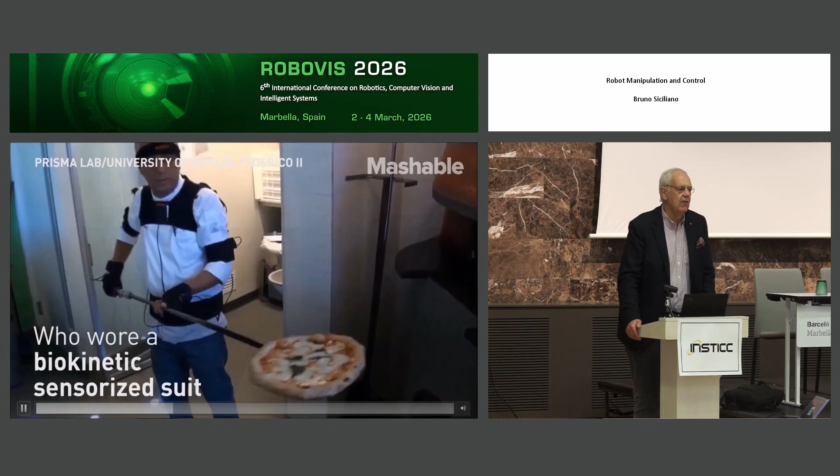Unfortunately there's no sound, but this illustrates the concept of dynamic manipulation. We built a platform, a humanoid platform. We had to make some choices because we wanted to control all the degrees of freedom, so we built our own torso, and used 2 Powerball arms manufactured by Schunk, together with 5-finger anthropomorphic hands.

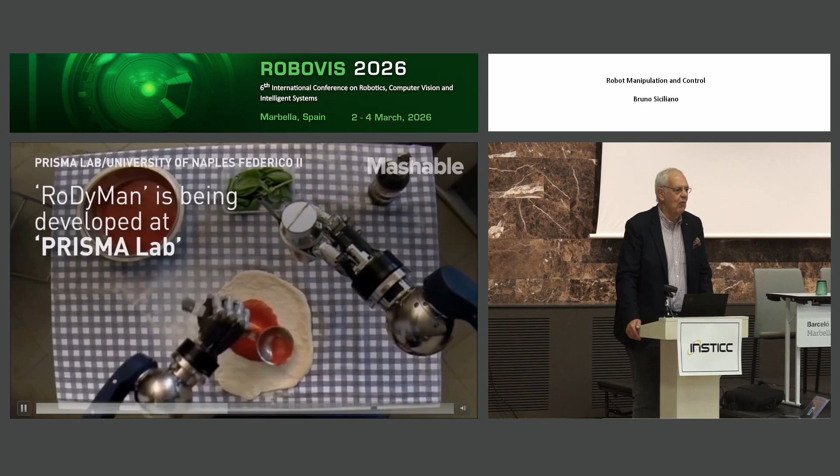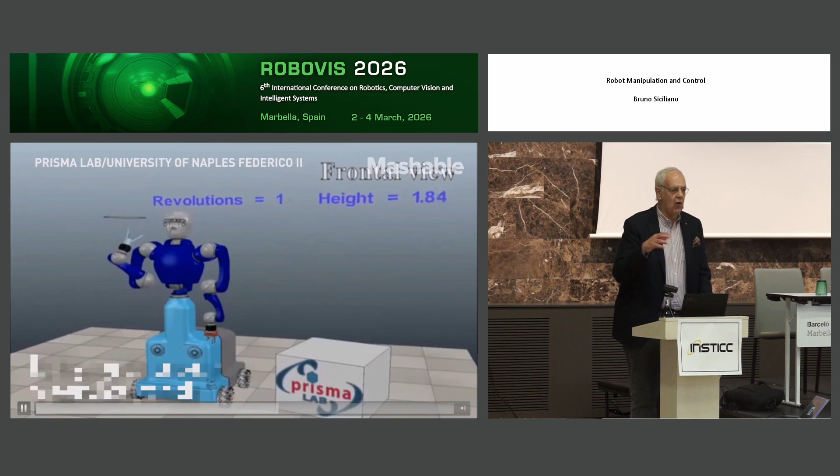We involved a Michelin pizza chef into the project, acquiring his motion through an Xsens suit with gyroscopes, accelerometers, and inertial measurement units. Then, through the Jacobians, we transformed his kinematics and biomechanical data onto the system.

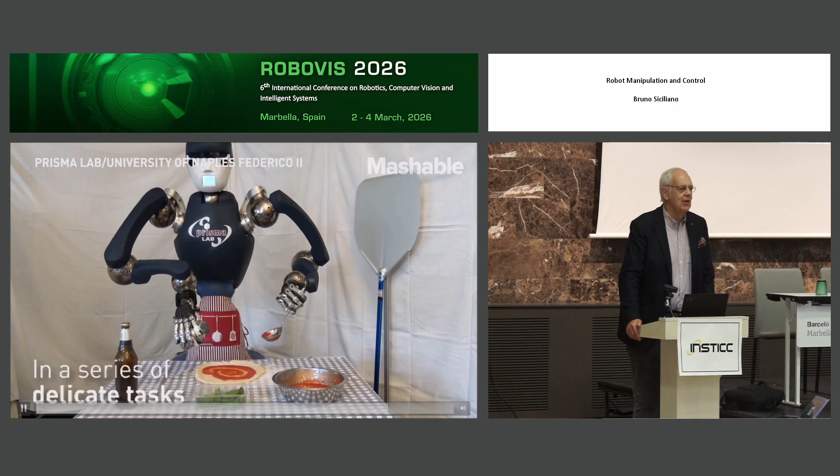You cannot imagine the coverage we had in the media, which was also a good way to disseminate what we're doing as a robotics community. The European Research Council places a lot of attention on dissemination, so this was a perfect media expedient to attract attention towards the robotic community and ultimately our lab.

It was clear to us that it was very difficult to develop a general theoretical framework for dynamic manipulation. So concerning the issue of non-prehensile manipulation, the best we could do, as this video clip shows, is to develop a number of primitives, trying to solve one primitive after the other.

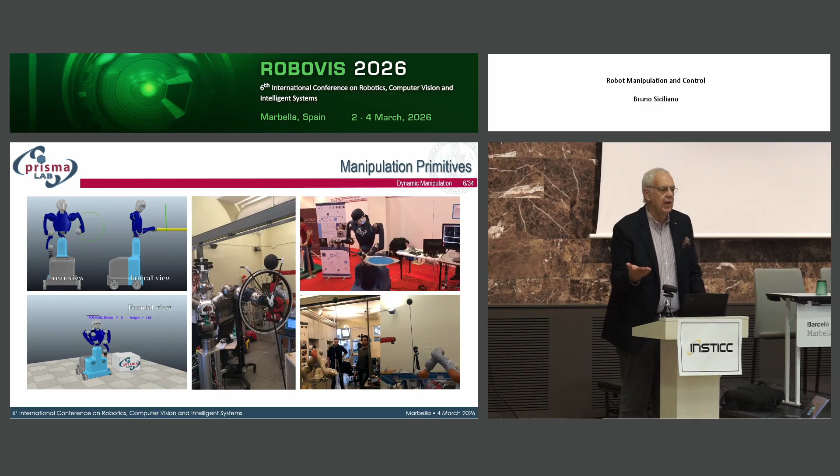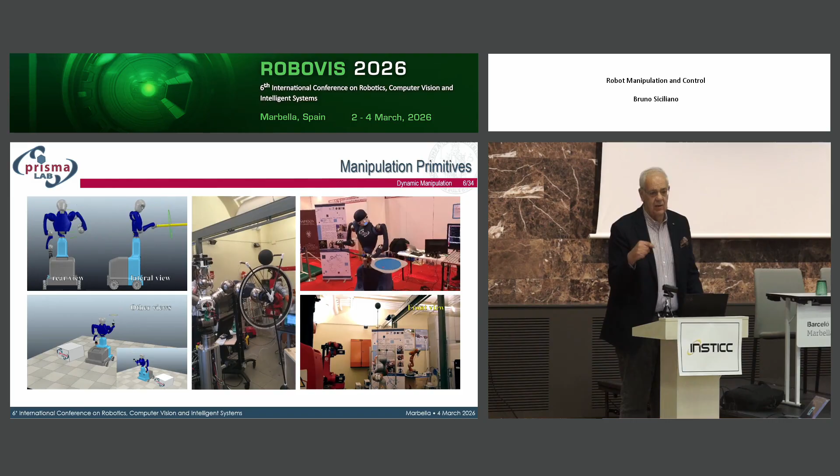For instance, the one on the upper right shows the issue of controlling the motion of the disc of pizza on a peel, with two motions: a swivel motion and a tilt motion. At the end, you want to control three degrees of freedom, because you have to control the position of the disc on the peel together with the orientation. That's why I say this is an under-actuated mechanical system.

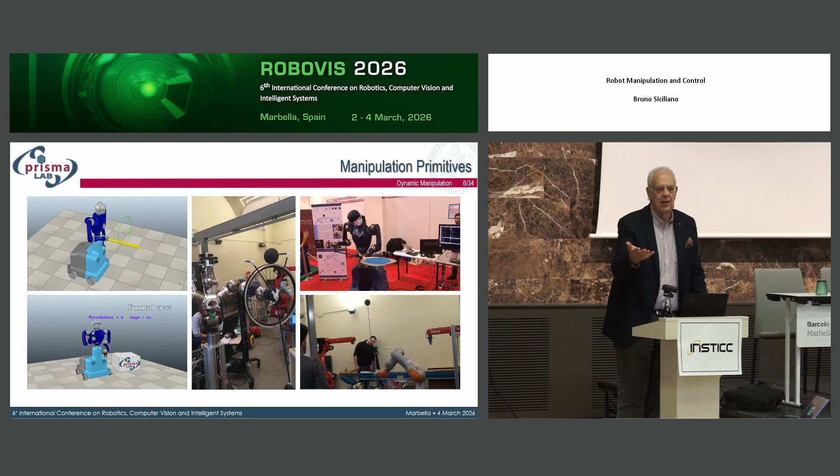Then you see some visual servoing, some sort of critical stability issue, like balancing a slender stick with a ball with the robot using visual servoing. That's another application of non-prehensile manipulation.

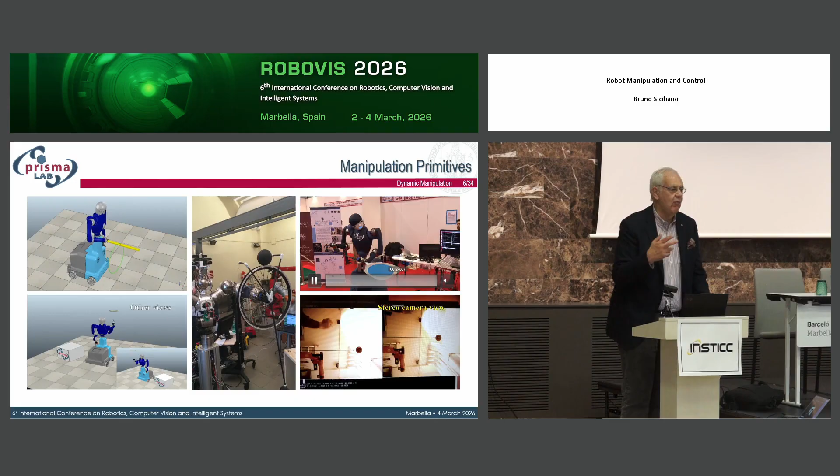Or maybe balancing a ball on a wheel, on a tire, where the ball can fall on all sides. So we were exploiting the redundant degrees of freedom of the platform.

Then you see some kind of simulation like a robot doing a hula hoop, or, the one on the lower left, just throwing a deformable object and finding a global optimal solution for what is the best posture for the robot to catch a flying deformable object.

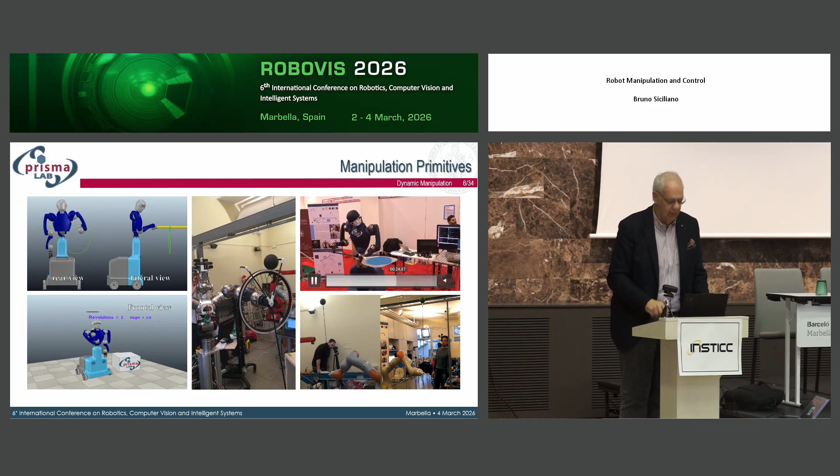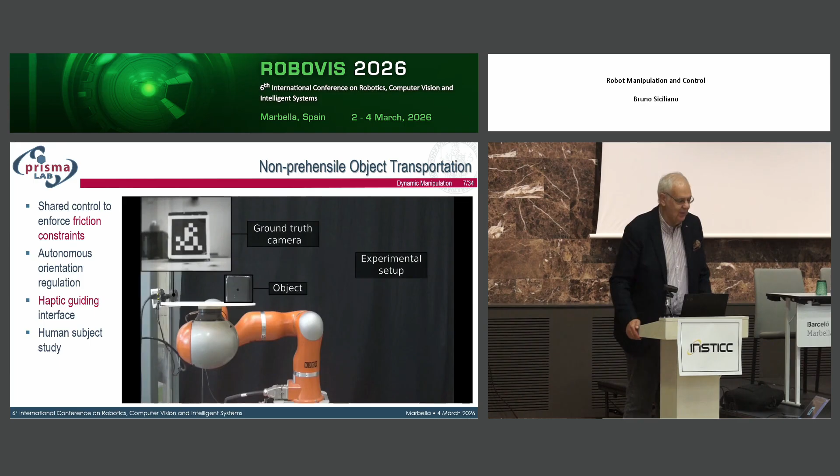After the end of the grant, we did some more work concerning non-prehensile object transportation. Suppose you want a sort of robotic waiter to carry some kind of object, and the object might be placed on a tray. Clearly, because of the dynamics, and also because you have some friction, typically what happens is that the object will unavoidably fall.

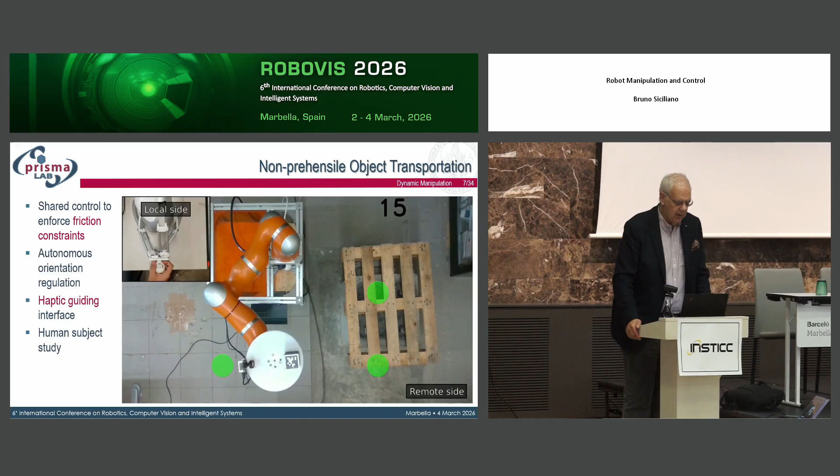This is a recent Transactions on Robotics paper in which these results are published. We carried out a study with human subjects using a haptic interface, and basically the algorithm we developed tries to compensate for dynamic effects, like Coriolis and centrifugal effects, exploiting friction to keep the object in balance even if it's not in the center of the tray.

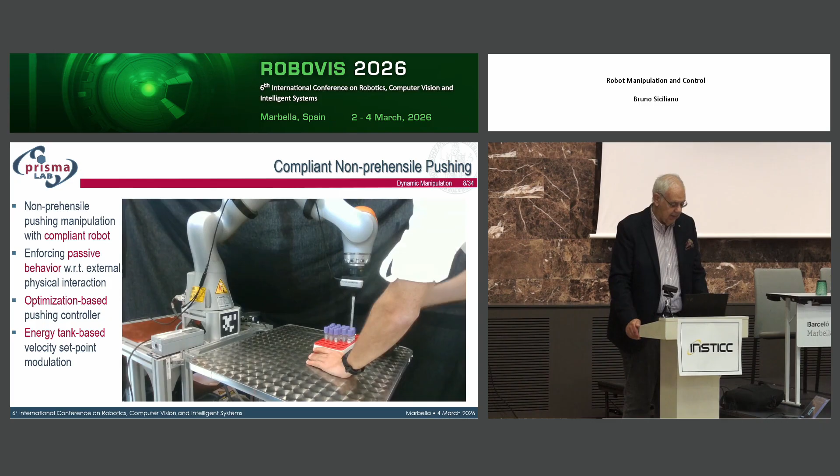Some more work we've been doing within a European project on logistics for hospitals. This is a robot used with some kind of sample probes, an example of non-prehensile pushing manipulation. This is a compliant robot, a KUKA iiwa robot that I'm sure most of you know.

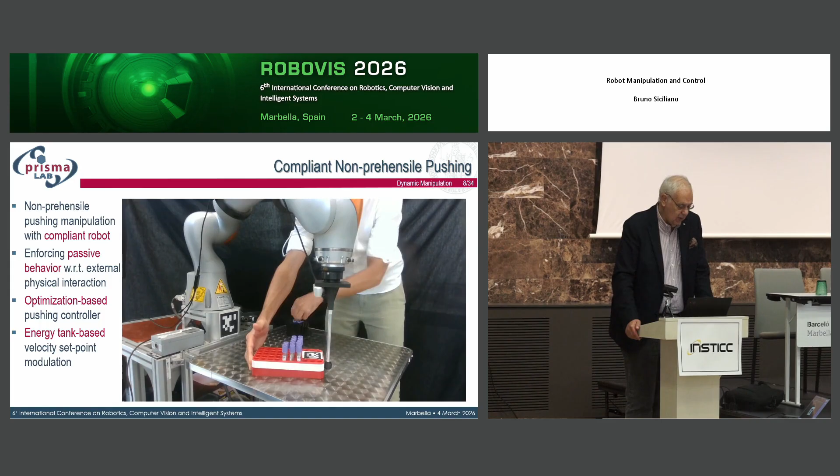Of course, we have physical interaction, and we have to guarantee that the human interacting with the tray of the sample probe ensures the whole thing stays stable. This can be done according to the control framework of passivity theory, which basically shows that no energy is produced, and in the physical interaction the system stays stable.

We can modulate the amount of velocity — this is the concept of the passivity theorem. I don't have time to go into details, but if you go to the website of our Prisma Lab team, you'll find downloadable PDF papers if you're interested, or you can contact me. That's the concept of the energy tank.

The beauty of robotics has been experienced recently within my team, because basically what do we do in robotics? We develop mathematical approaches to describe the physical system. This is one example of the transversality of theory across robotic systems, because what we observed is that the issue of non-prehensile manipulation is conceptually similar to the issue of a biped, of the gait of biped walking.

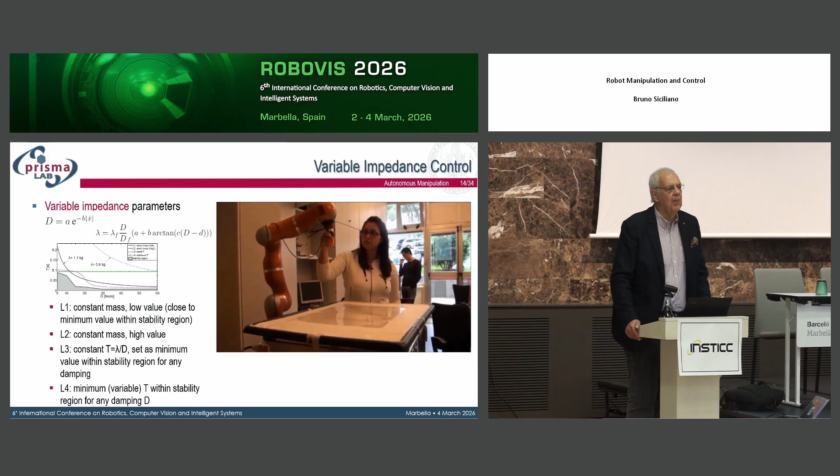And this is very much in line with the Industry 5.0 paradigm. What's the difference in transition from 4.0, the fourth industrial revolution, to the fifth industrial revolution? It's to develop a theory that is customizable to the skills of the individual user. With this concept of variable impedance control, there are some performance indices, but basically the KUKA lightweight robot can adapt to the inertial characteristics of the human and comply with the user in such a way as to draw a line with a pen, in a sort of cobotics fashion.

I've been teaching robotics now for 40 years. Our new textbook is out since last September, Foundations of Robotics, with my former student and now full professor Luigi Villani, and two colleagues and friends from Sapienza University, Giuseppe Oriolo and Alessandro De Luca.

You know that the development of multi-finger hands is not as well assessed as the development of the theory of mechanical design, modeling, planning and control for robotic arms, because of the complexity of multi-finger hands and the fact that a multi-finger hand involves, in theory, too many motors, too many actuators.

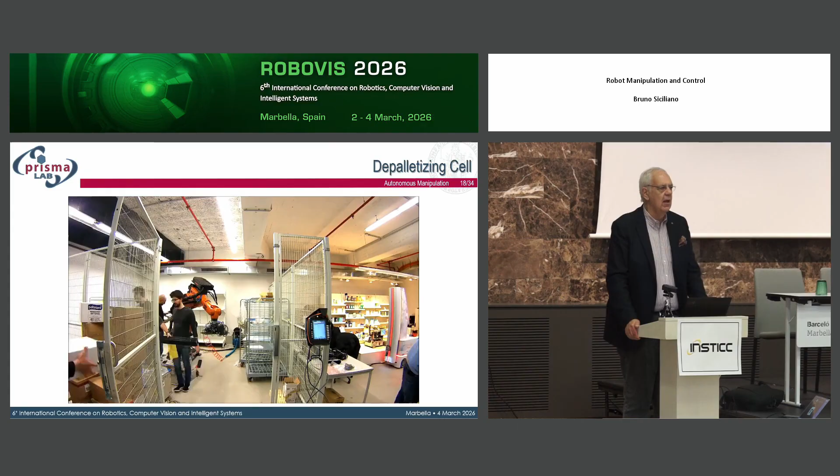A final contribution I'm going to show is in the framework of another European project, the REFILLS project, together with University of Bremen, Università Vanvitelli, and some industrial partners like KUKA, Swisslog, and DM, a major company for supermarket retail stores. The issue here was a depalletizing cell.

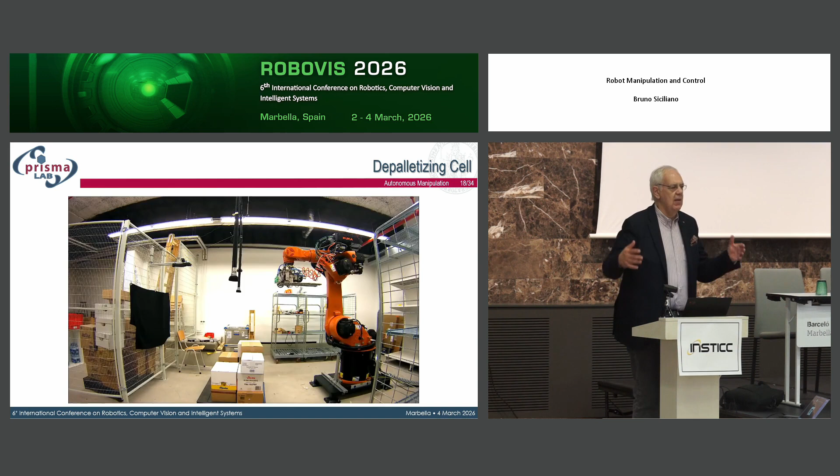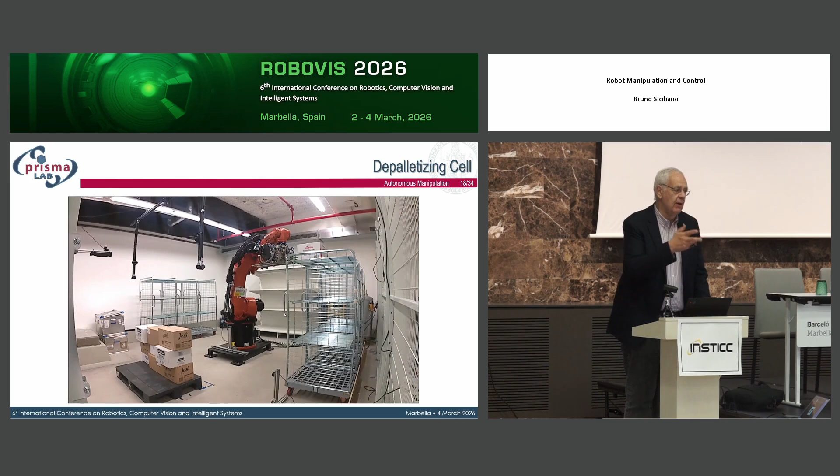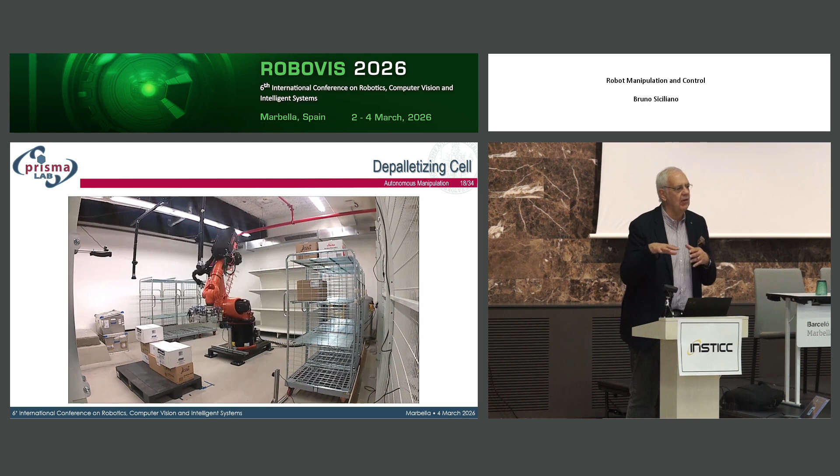The pallet comes with a number of objects, and you cannot assume you can scan the barcode, because that depends on whether it's visible or not. So we developed a special gripper with a forklift and a load cell, a force sensor. Merging vision and force feedback, we were able to do this autonomously, with the robot recognizing the content of the box and sorting the various boxes to the trays to be delivered to the shelves of a supermarket. This was autonomous manipulation.

The third segment is devoted to aerial manipulation. This is another story I want to share, because research, community building, and teamwork is also built through a number of stories. I got a phone call from a colleague at the University of Bologna, alma mater, Lorenzo Marconi, a control guy, and he wanted to get us involved, in 2009, in a project on aerial manipulation.

We had no background in aeronautical or aerospace engineering, so we didn't know the dynamics of flying robots. Drones, the flying robots, had been used for a long time just as a sort of flying eye. What was the new challenge? To develop the concept of the flying hand, to do some kind of aerial manipulation. My team was skeptical, but I said, come on, we are control engineers.

We can derive a mathematical model of the dynamic system, and understand the control issues, the motion planning issues, the sensing issues, and also the contact issue when the aerial robot is in contact with an object. That proposal was successful, and this was the AIRobots project. Then we worked together with other colleagues in the European community - Juha is one of them, I'm glad to see him again. I'm going to show you some results on aerial manipulation through a number of European projects in which we were active.

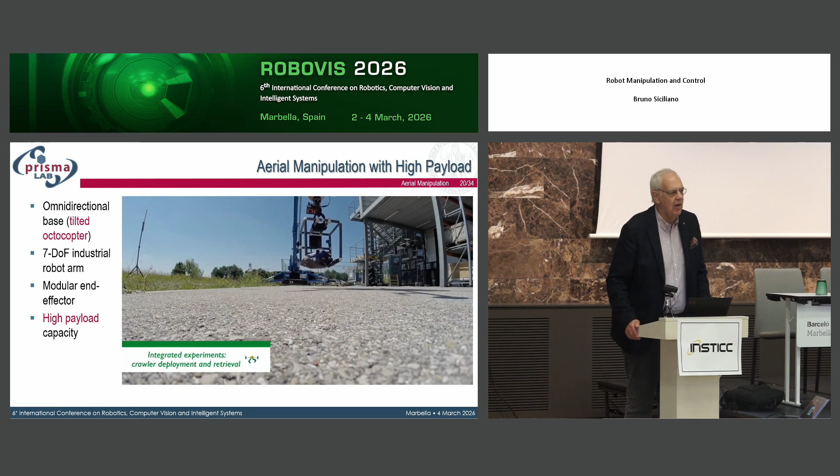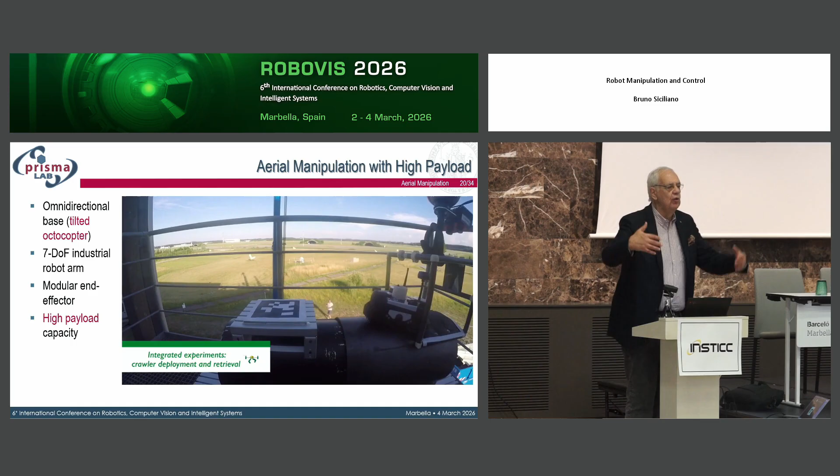This is the idea of manipulating for crawler deployment and retrieval of a big object. Within this project, we were able to mount a lightweight robot by KUKA as a payload to a huge octocopter, with 8 rotors, to do some sort of deployment and retrieval of big objects.

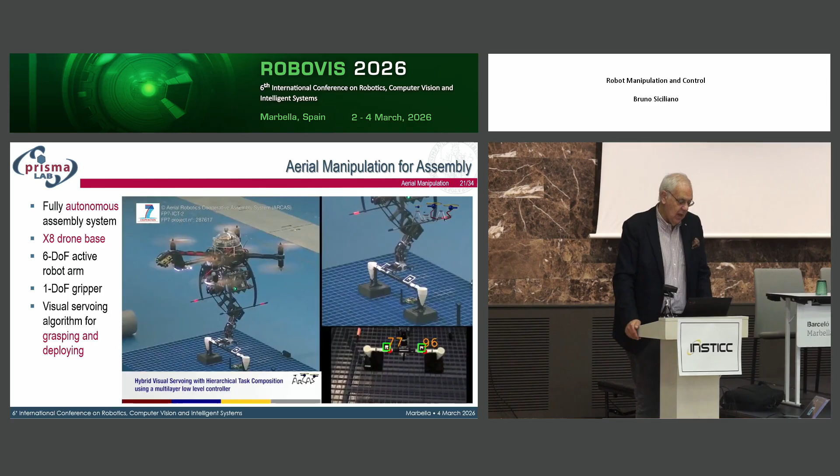Another work we did is the concept of cooperative assembly, using two or more drones, multicopters, to do some sort of task, and this was done autonomously. This is a typical cluttered environment with some obstacles, and here we have a fully autonomous assembly system. There is no planning, you don't need a drone pilot to do this - it's all autonomous. We have a 6 degree of freedom arm, and also a simple 1 degree of freedom gripper.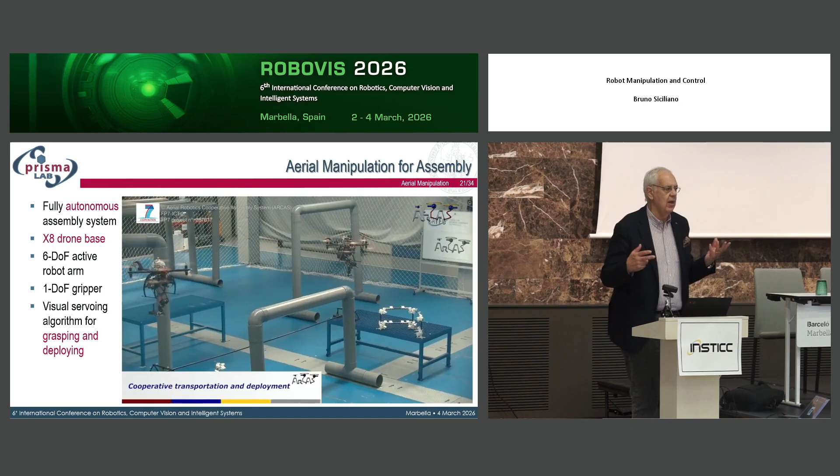And so this was some experimental work that we did to do a sort of autonomous assembly of the sticks for a sort of truss structure, in a sort of clutter environment.

Then some other work that we've been doing on inspection and maintenance, both of industrial plants and civil infrastructure, concerns the issue of non-destructive testing. So this is the UT inspection of concrete structures. You might remember the tragedy of the Morandi Bridge in Genoa that collapsed 8 years ago, and 43 innocent souls were killed. This was sadly also because of lack of systematic inspection and maintenance.

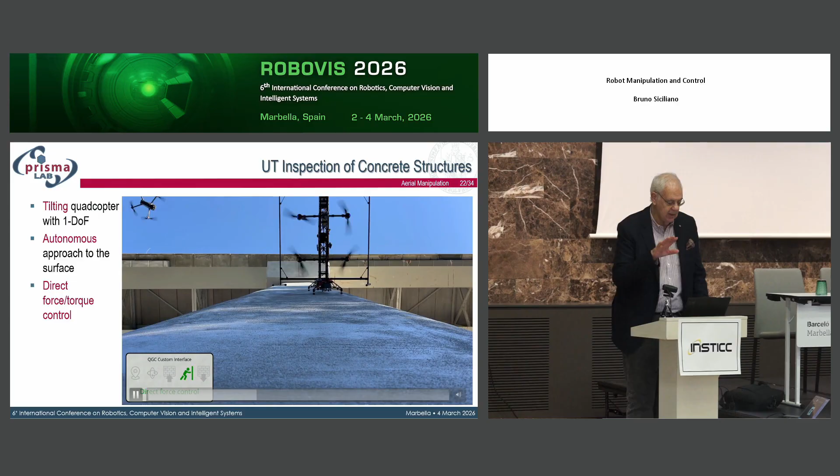And so we developed this drone. This was designed in-house with direct force torque control, in such a way that the drone can just check the structure, the concrete structure of a viaduct. This is a viaduct of the Tangenziale in Napoli, to check if there is any kind of crack, any kind of failure in the concrete walls. And so for this, we're using a tilting quadcopter with a simple 1 degree of freedom, because we want this to always be orthogonal to the surface.

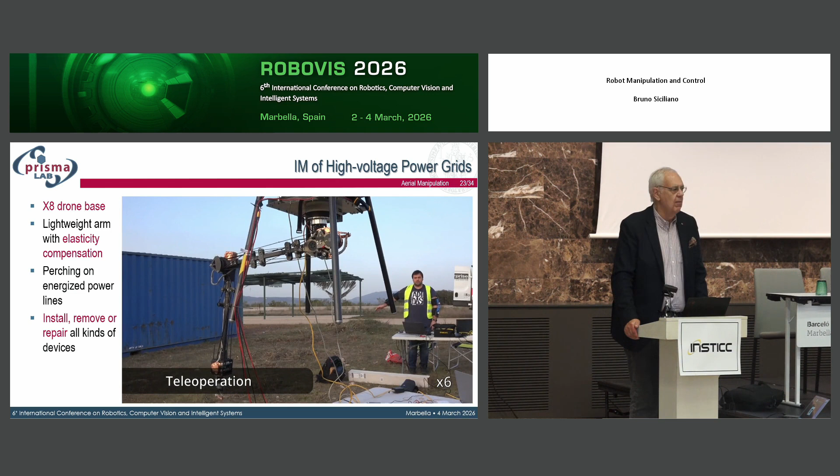And another application of aerial manipulation is encountered for the inspection and maintenance of high voltage power grids. And here, there was a sort of keen idea to exploit the magnetic field of the line to automatically recharge a drone, because one of the caveats of using drones is the autonomy, since the payload has to be traded off against the power of the rotors. Typically, the autonomy is about 20 minutes or half an hour.

In this case, we have installed an automatically recharging station. So the drone just flies, lands on the line, and then this is the recharging.

And in this case, we have this project that is just for the bird diverters, because when the birds migrate, they overload the line, and so the line can be damaged. So just placing these bird diverters on the line, this is a sort of job that is high risk, and also it's kind of expensive to be done by humans. So it's clear that this can be replaced by using robots.

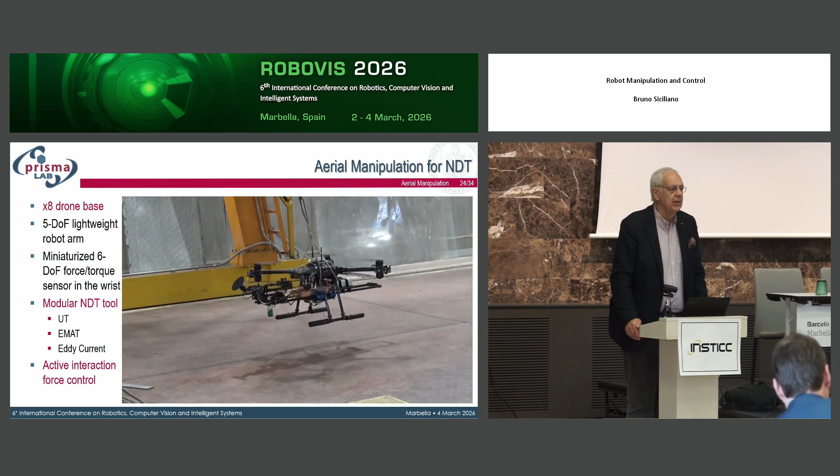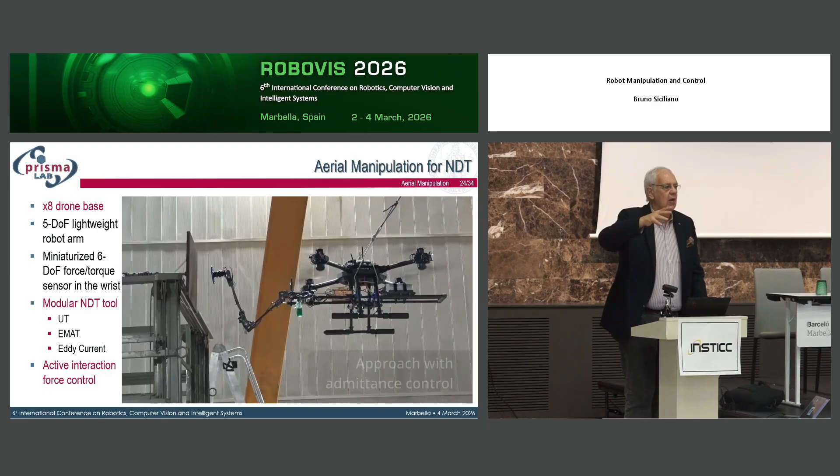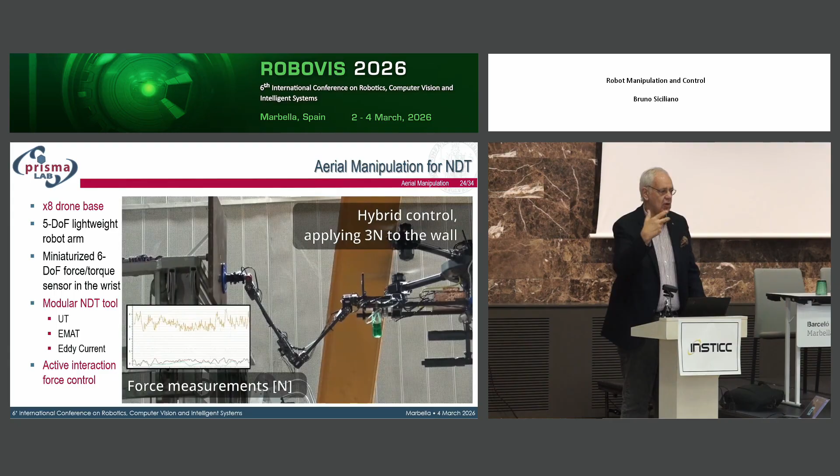One more example of aerial manipulation for non-destructive testing, in which we have extended the work with a simple degree of freedom contact to the case of a 5 degree of freedom lightweight robot arm. And basically, we're doing some inspection of the surfaces in which not only do we care about the position, but we're also using ultrasound sensors and other kinds of sensors like eddy current sensors, and basically a load cell. So we can modulate the amount of force, and also control this force.

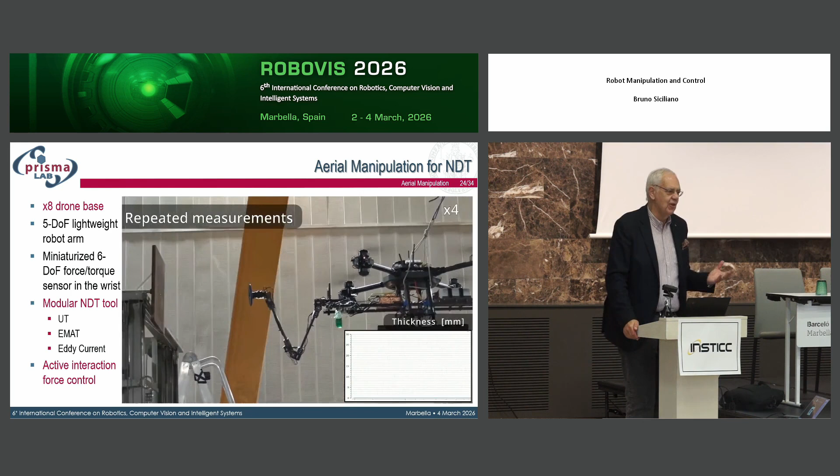So it's nice to see that the validity of the approaches that we had developed theoretically for ground-based manipulation also works in the air while the drone is flying and everything is stable.

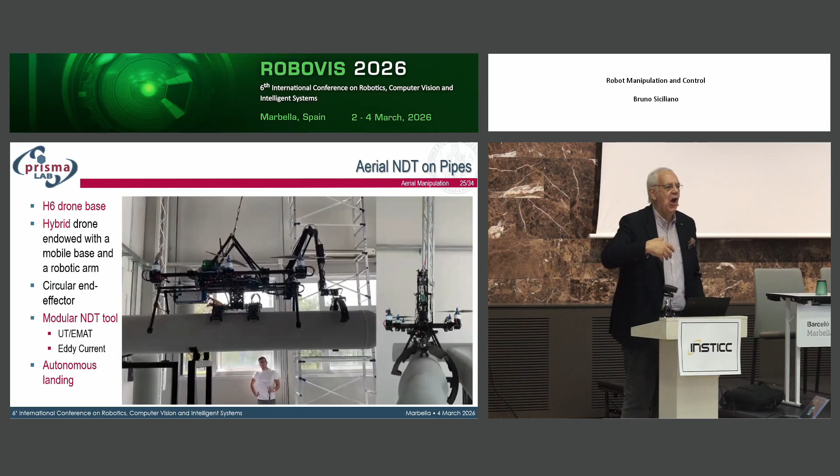And also, in another follow-up project not shown here, we actually developed this in a modular fashion. So the drone flies this kind of robot like a snake, and we call this project Koala, like the animal in Australia, and it does all the thickness checks. And then the drone flies back to recover the koala and carry out the mission.

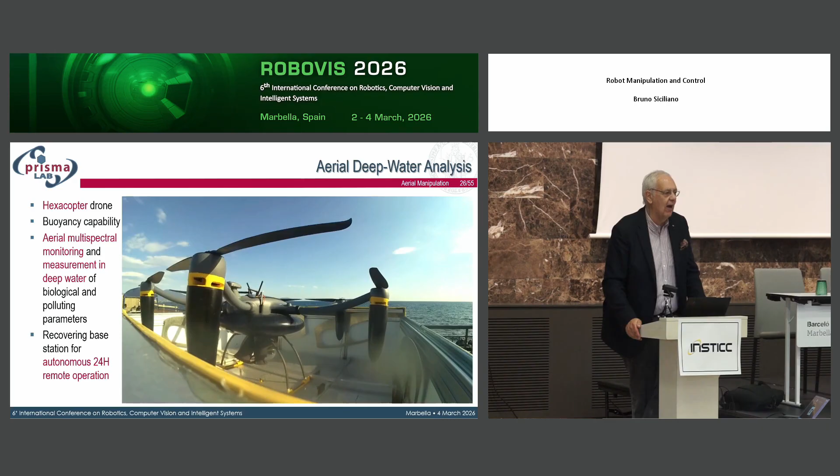Also, speaking about a hybrid system, this is the beautiful Gulf of Napoli, sunny. Unfortunately, we have rain today in Marbella, so you saw the island of Capri, and this is a sort of aerial aquatic drone. So we can do this autonomously for deep water analysis, and we tested it in the Gulf of Napoli.

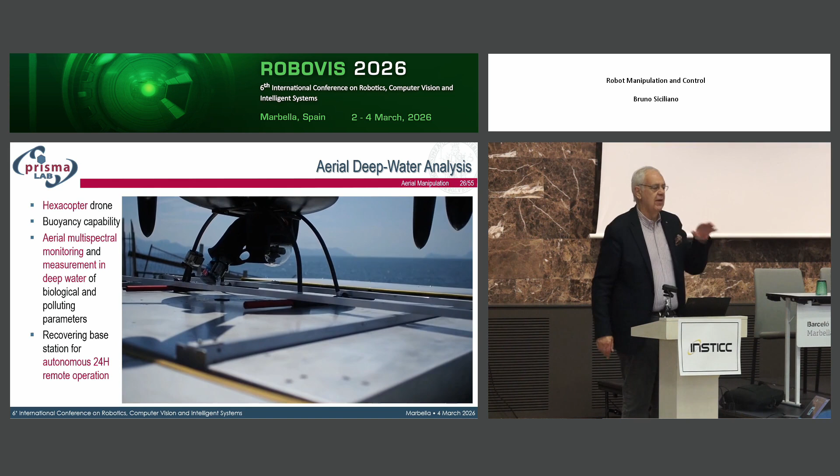This is Capri, and so basically we have a path planned, and the drone goes, and then lands on the water. Once it has landed on the water, there is a sensor probe that can go as deep as 50 meters and can measure parameters like temperature, salinity, pH of the water, pollution, and all kinds of biological samples that you want to inspect in any kind of basin.

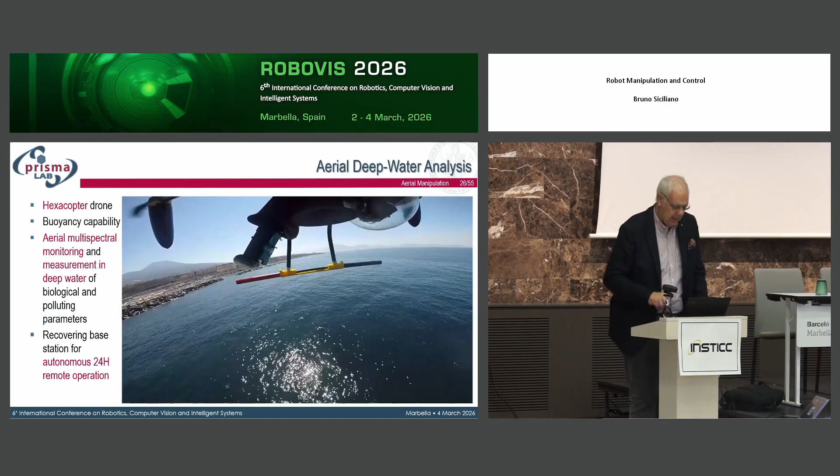Could be salt water, could be a lake, could be any kind of water - so this is landing, and then you see the final part of the task with the probe just going underwater and checking some kind of biological and polluting parameters.

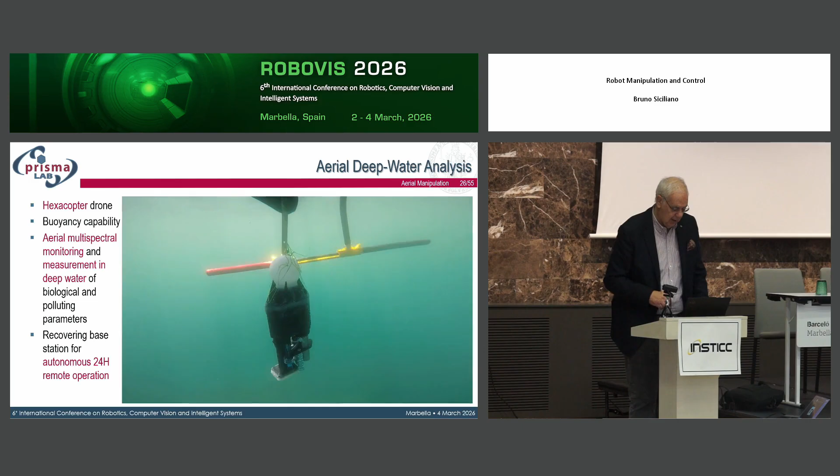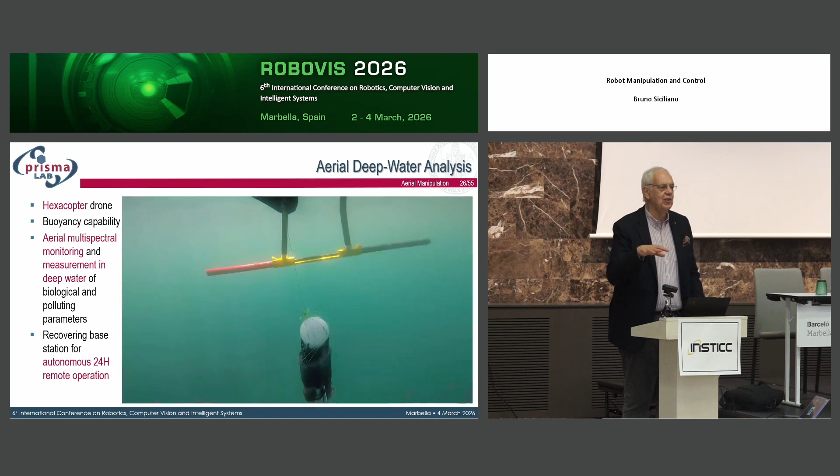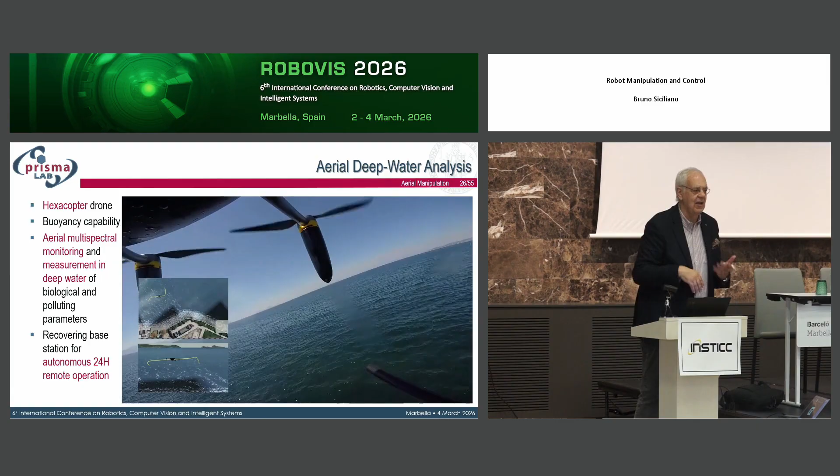We are currently extending this work because, as you saw with the buoyancy mechanism for floating, the idea is we have also empowered this drone with thrusters. Not only do we want to land on the water, but with thrusters we also want to do some kind of navigation, so it's a really transformable robotic system - you don't have to fly to another spot, you can navigate. So that's just some extension of the work.

The final part of my talk is about haptic shared control. What is meant by haptic shared control? It's just the merge of two concepts. One concept is haptic guidance, as in the work of the object transportation I showed, and the other concept is shared control - trading the level of autonomy when you have a physical human-robot interaction system.

So what is autonomy? There's been a taxonomy of autonomous robotic systems, published in Science Robotics four years ago, in a survey paper for surgical robotics, describing six levels of autonomy in robotic tasks. The idea is to reduce the operator's physical and mental workload and to entrust the robotic system to do some part of the whole task autonomously.

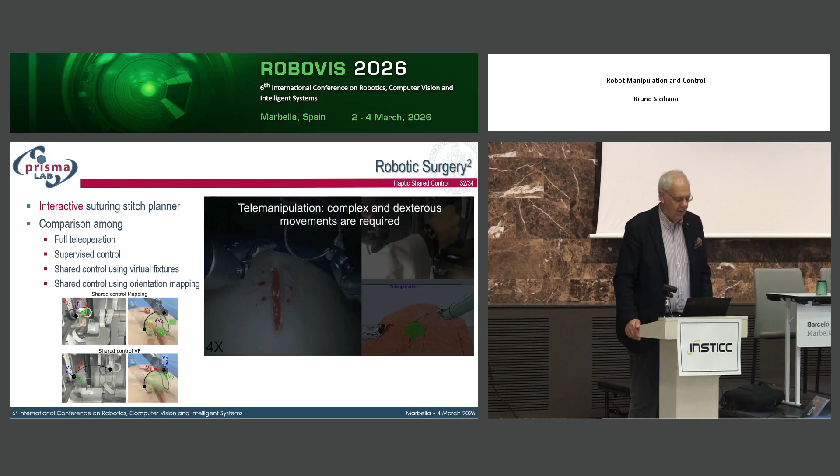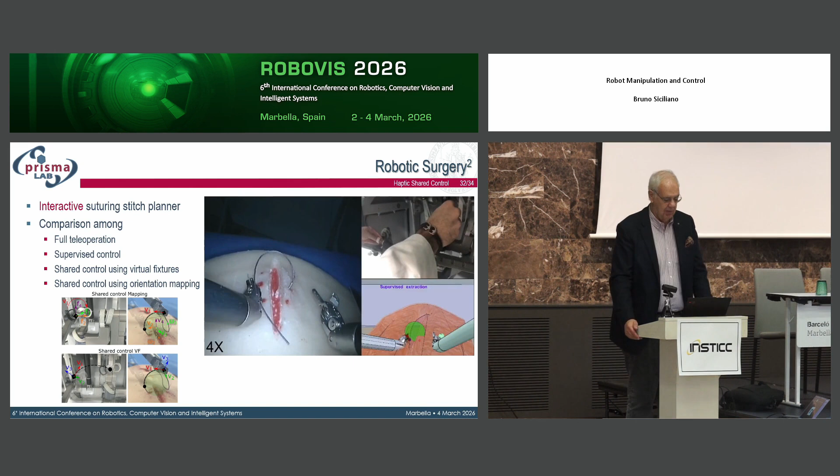This is another study we did on robotic surgery, in which we compared different techniques: the classical full teleoperation technique, like in the Da Vinci surgical robotic system, with supervised control, shared control using virtual fixtures, and shared control using orientation mapping. This is the study in which we tested the various algorithms.

The final slide I am devoting my talk today to is our current Synergy grant. This is funded by the European Research Council. This is a joint project with three friends and colleagues.

Kaspar Althoefer is the head of the Advanced Robotics Lab at Queen Mary University of London. He was the general chair of ICRA in 2023 in London.

Sébastien Ourselin is a big expert on AI and medical imaging at King's College in London. And then the user of the technology is the surgeon, Alberto Arezzo, one of the top surgeons for endoscopic surgery. He is the current president of the European Association of Endoscopic Surgeons.

What is the challenge here is to fight colorectal cancer, because sadly, colorectal cancer is the 3rd worst killer, and the level of mortality is about 50%, because in 2020, there were 600,000 cases of CRC diagnosed in Europe, and 300,000 people died. But the level of mortality of the cancer itself is not that bad. Why is that?

Because people do not undergo systematic screening. And the best and only reliable technique is colonoscopy. But with colonoscopy, you only have a diagnosis of the suspect cancer mass. What you have to do typically is take a bioptic sample and analyze it, then come back a month or a month and a half later, depending on the stage of the polyp. You have to decide whether you can do this with another colonoscopy and some rudimentary tool, or you have to do open surgery or laparoscopic surgery, usually with radiation and chemo treatment. So our revolutionary idea with this Synergy Grant project is to develop a sort of theranostic procedure.

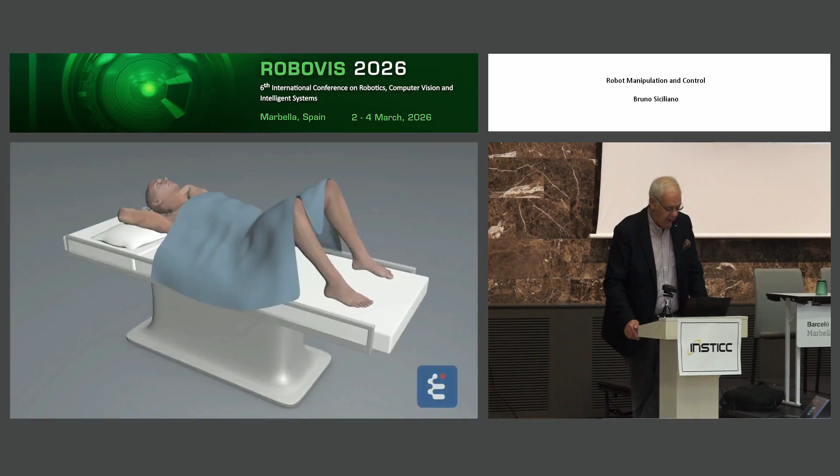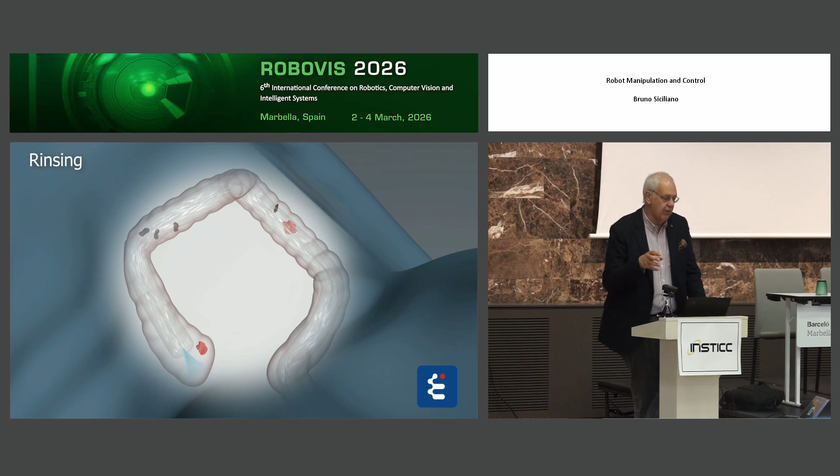So this is a kind of rendering illustrating the concept. This is the patient ready on the table for a colonoscopy. And instead of using this rubber colonoscope, what we use is the concept developed by Kaspar and others: the eversion robot. It's a tip-growing robot. We pump air, so it's pneumatically actuated, and this eversion robot creates a sort of tunnel, a shuttle, in the colon.

You can do some rinsing of the residual feces after the purge, after the preparation, and then you're ready to do the inspection with the capsule. The capsule already exists. It's been patented by Alberto and other researchers at Scuola Sant'Anna in Pisa, in the group of Paolo Dario. This capsule just navigates and stops in proximity of the suspected polyp mass.

Then you have to do the sensing and the staging of the polyp. But then how do you operate? And this was our idea: to use a negative gradient of pressure in such a way as to suck the polyp inside the operating theater.

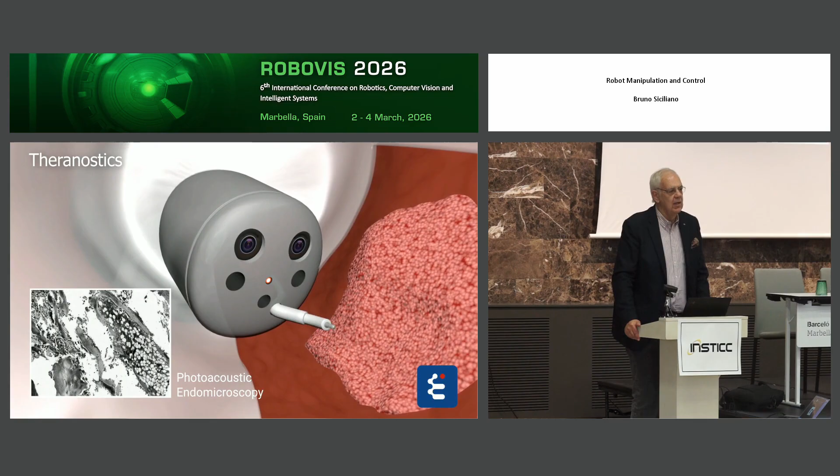So this is the capsule with white light illumination. That's the rinsing channel there. And this is the multi-sensor probe that we are developing, which embeds optical ultrasound as well as photoacoustic endomicroscopy. Because the more subtle issue is the removal of flat adenomas.

Those are almost impossible to excise with the current technique. Once you have staged the polyp, you have this bimanual micro-robot with a cutter and also a fenestrated grasper, in such a way as to cut around the polyp mass and remove the suspect mass in one shot. So you do the diagnosis and the manipulation in one shot.

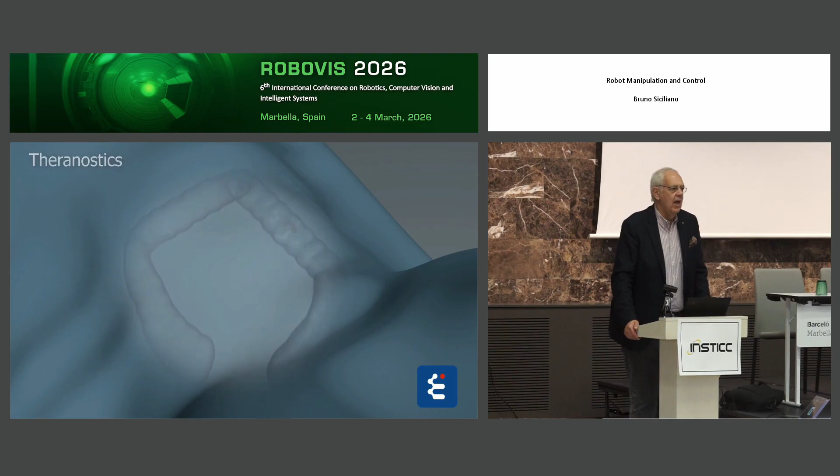The project will be over by 2030, and the ambition is also to do the clinical translation into a technology with a startup company, and probably sell this technology to one of the big players like Medtronic or Stryker, all the players that develop medical robotics technology. So that's all I have today.

My inspiring motto, as most of you know, is keep the gradient. Thank you.